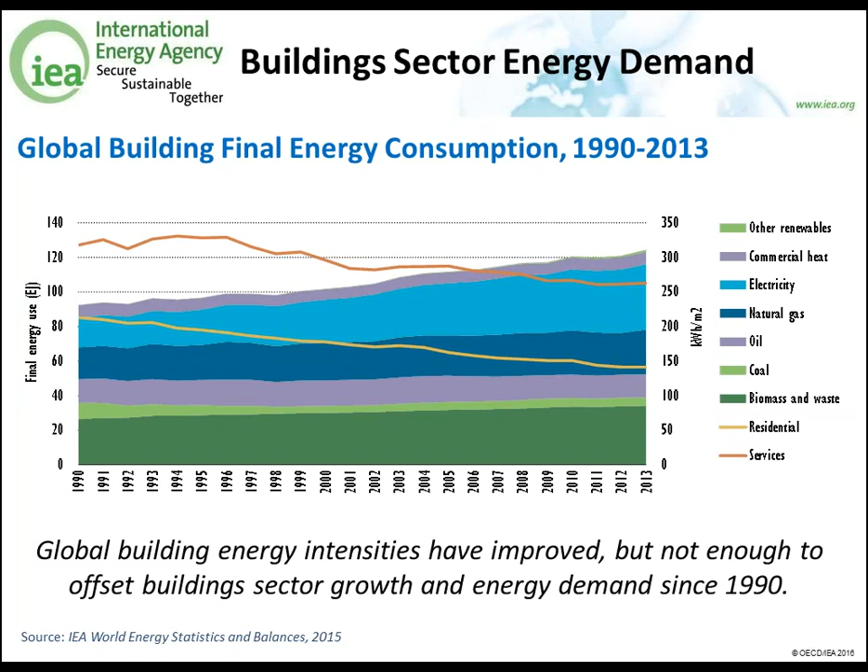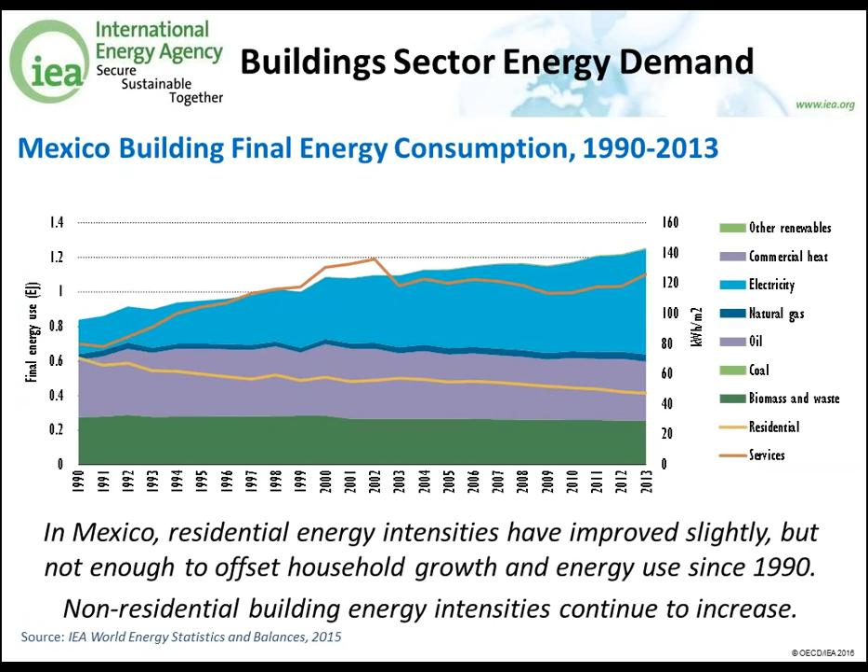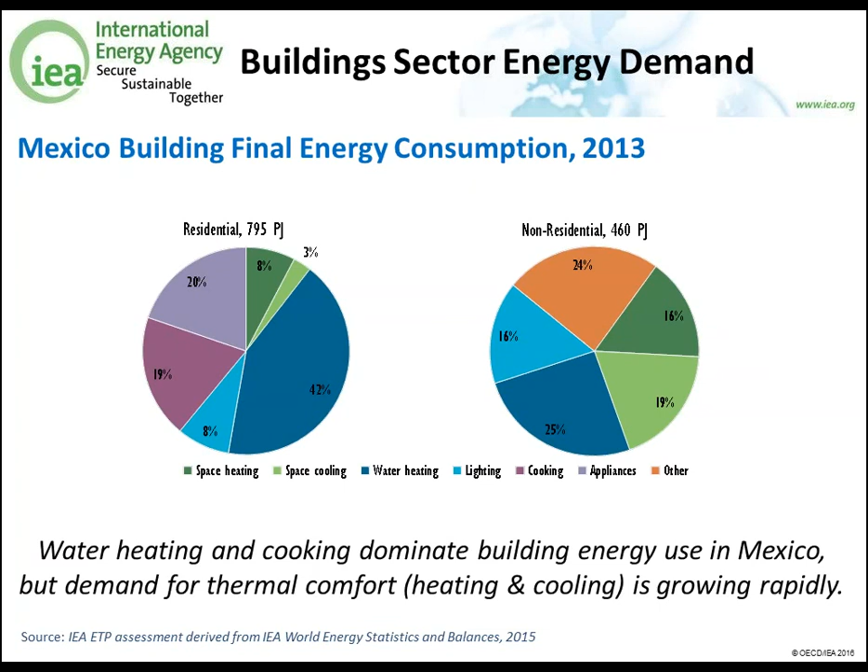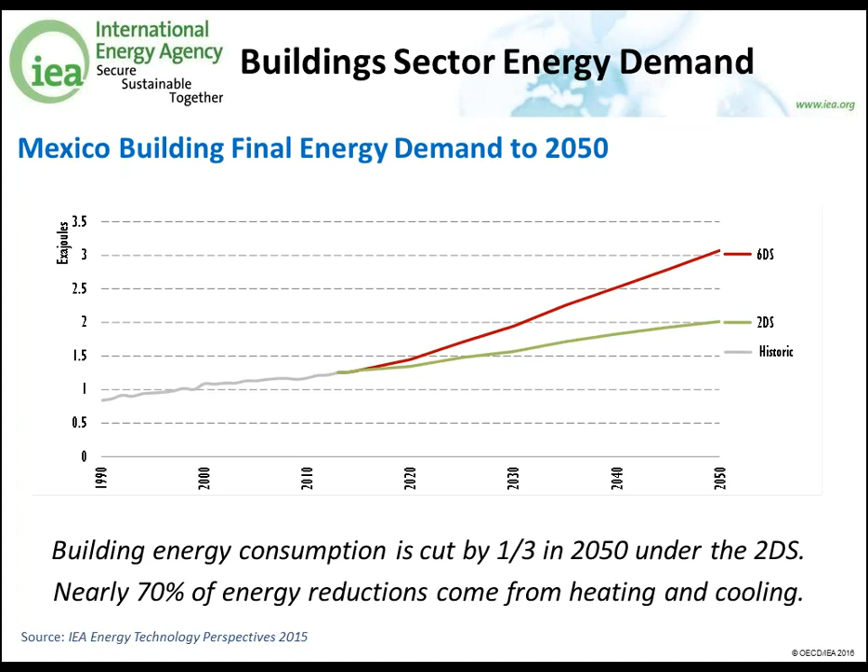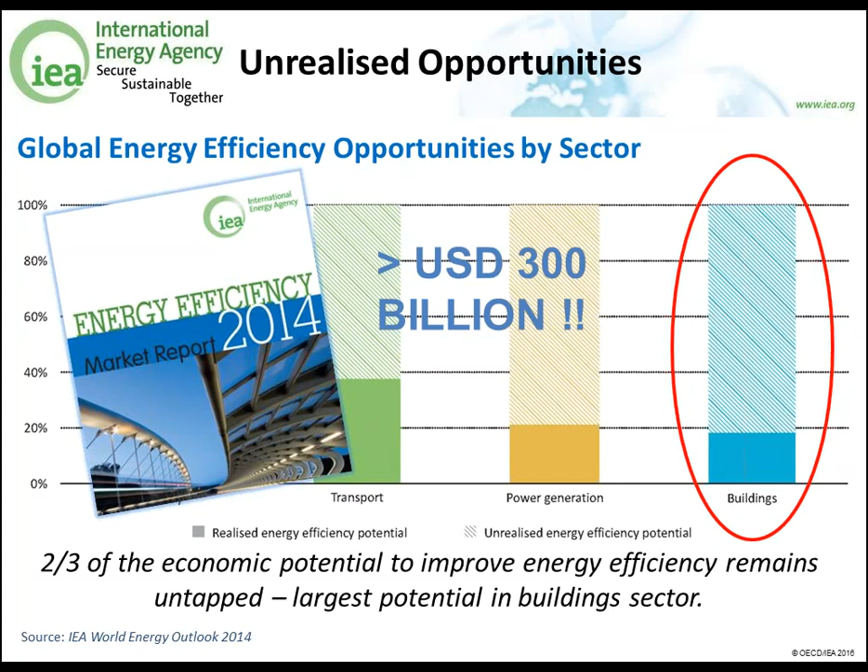And increased household income because of less money spent on energy in the building sector, which has implications for the broader economy. Taking these into account, we have a much more holistic picture of why energy efficiency in buildings is important—not just for reducing energy demand and carbon impact from emissions, but also for the numerous benefits from these multiple benefits of energy efficiency action.

So with that, we'll speak now more to heating, cooling, and water heating opportunities in Mexico, where these are the bulk of the energy efficiency opportunities and savings in the building sector. For those interested in other building end uses, such as lighting and appliances, we have done previous webinars on these topics, and the information can be found online. It's also possible to find practically all of the information we're sharing today for free on the IEA's website.

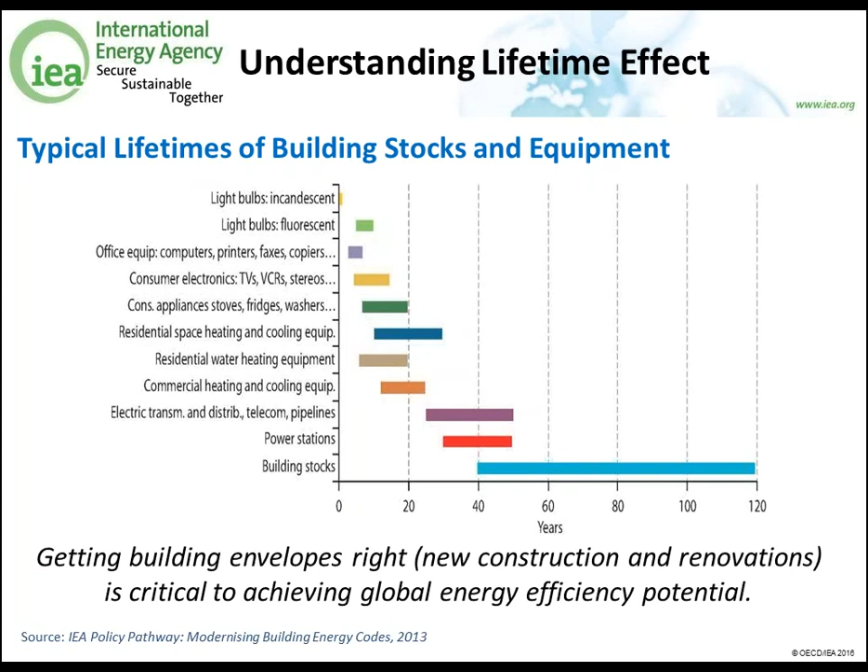And yet buildings, in this sense, are probably the one area that is least treated in these discussions about long-term energy efficiency potential and investment.

Typically what happens is some of this building stock disappears due to demolition, and even in a business-as-usual scenario, some moderate renovations of existing stock occur. Then, looking forward, especially globally and in emerging economies like Mexico, a significant portion is new construction. So how do we build those buildings? How efficient do we build them?

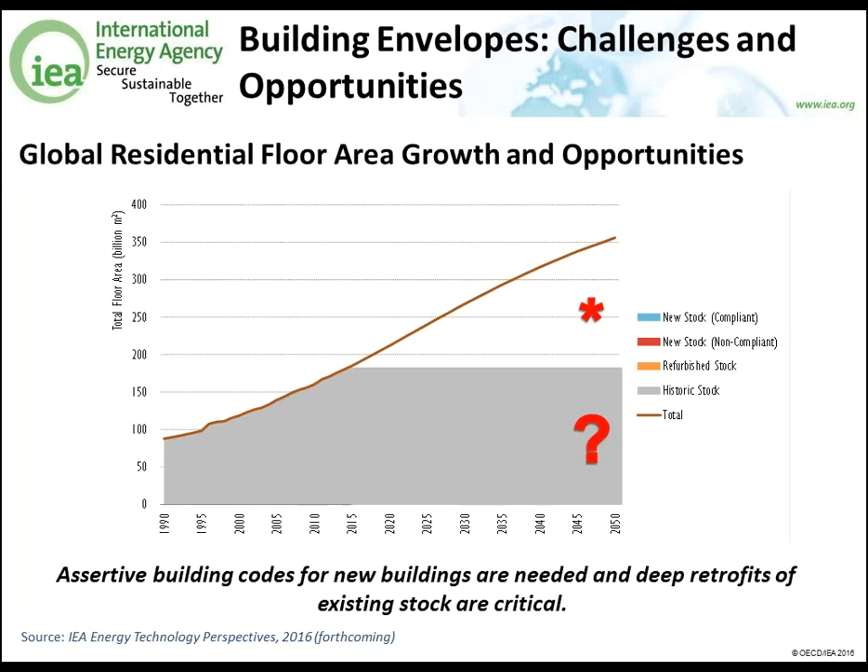In a business-as-usual scenario, our 6DS, we typically expect that roughly half—this depends on the country, the level of enforcement, and the presence of building energy codes—but globally speaking, roughly half of the building stock is probably compliant with building energy codes, whereas the remaining half of new construction is either not compliant or does not have an applicable energy code.

When you look at this in terms of total square meters, remembering that space heating and cooling are globally the largest energy demands in the building sector, this becomes really important, because it essentially means that half of the new construction we expect between now and 2050 will not be compliant with energy codes or have any energy codes applied at all—meaning those buildings will consume much more energy for heating and cooling than they could have had we put those energy codes in place and enforced them.

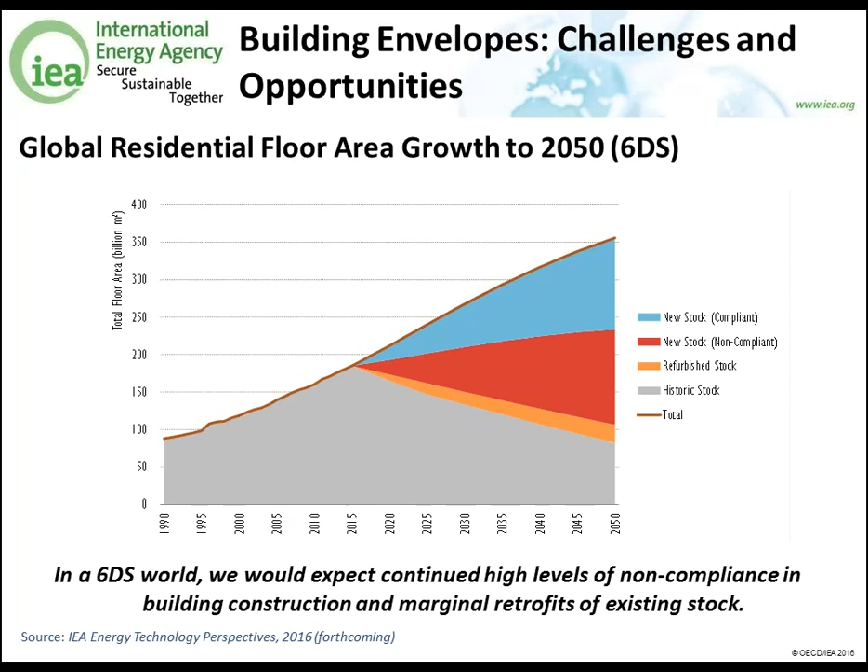In terms of the existing stock, and this applies to certain areas in Mexico where substantial buildings have already been built in terms of total square meters, we want to make sure that when renovating those buildings, we address the energy efficiency opportunities to the most cost-effective potential.

So in a 2 degrees Celsius scenario, globally, what we would expect to happen would be increased use of building energy codes across all countries, making those codes more stringent over time, and putting in place the infrastructure to enforce compliance within the design, construction, and post-construction phases.

We can speak more to this point later on how to develop and implement building energy codes. And of course, making sure that the existing building stock, or the bulk of it, gets refurbished by 2050. Taking into account average building lifetimes, roughly 80% of the world's building stock already in place today will still be in place in 2050.

If we don't address energy efficiency retrofits in those buildings, we are very unlikely to meet the energy and emissions targets for the global building sector.

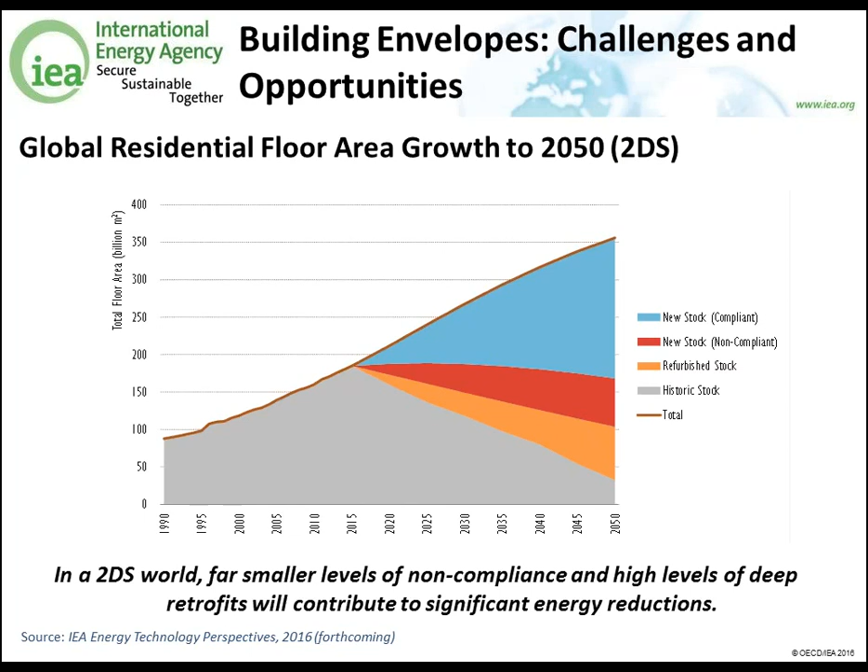As I mentioned, for emerging economies in particular, and especially Mexico, targeting new buildings and energy efficiency in new building development is critical, where we would want to move away from existing construction practices, which in most parts of the developing world and even in many developed economies are relatively inefficient.

This might mean things like single pane windows constructed on site, very low or no levels of insulation, and high air leakage, compared to typical building codes that exist in most advanced regions today.

This would be things like low emissivity double glazed windows, and I'll come back to the point on low emissivity in a second, high levels of insulation, and lower air leakage compared to traditional construction.

What we want to do is move this market, particularly for new construction, towards near zero and zero energy buildings, where we have high levels of insulation and air sealing.

We are using advanced window products, including dynamic solar control, to take advantage of opportunities, such as when we want the sun to influence heat in buildings and when we don't want it to influence heat in buildings.

Also optimizing building design, where in most parts of the world there has been a significant movement to the use of all glass or highly saturated glass surfaces, especially in the commercial sector, and where buildings, because of urban development and urban design, often are not optimized relative to their environmental situation.

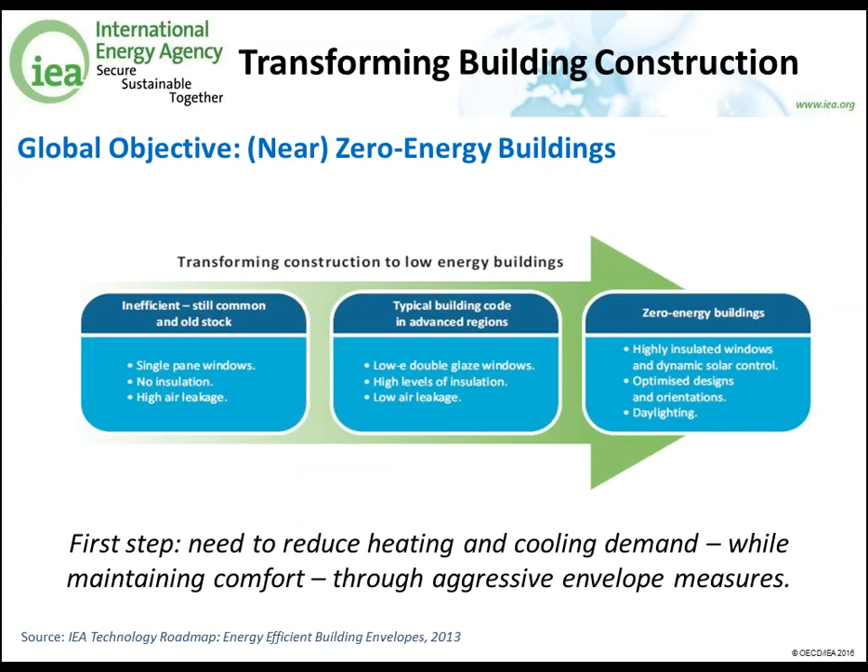We also don't typically design buildings to take advantage of natural cooling, natural heating, and natural daylighting. If these were integrated into building design, we could significantly reduce the final energy loads in buildings.

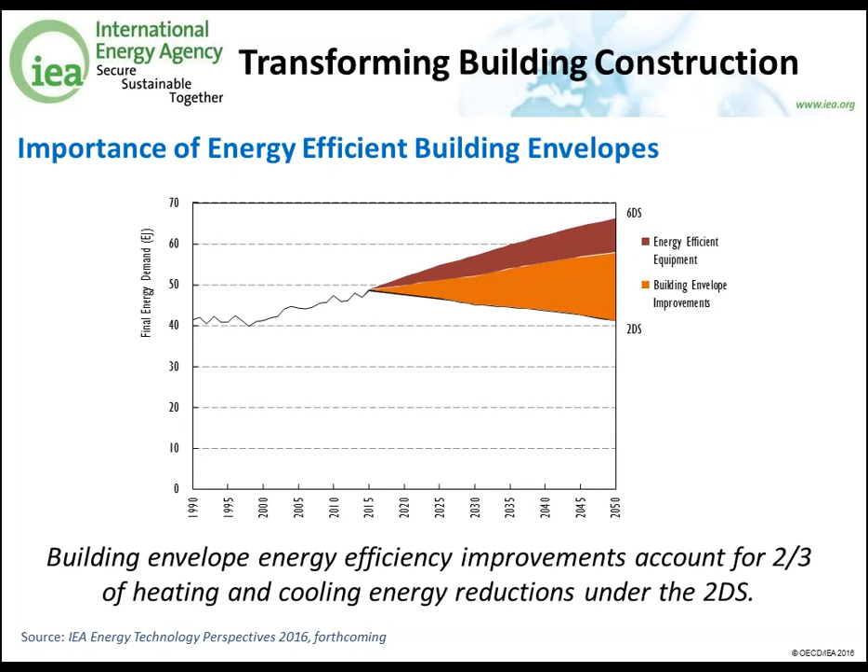In terms of the role of building envelopes in energy savings potential for heating and cooling, our model assessment finds that more than two-thirds of heating and cooling energy reductions are likely to come from building envelope improvements. This is only possible through the development and enforcement of rigorous building energy codes that address building construction and, in existing buildings, seek to improve efficiencies to the most cost-effective point possible.

So in terms of the components, once we've constructed a building, my colleague Brian will come back to some of the policies related to implementing and enforcing building energy codes. Once we have these buildings in place, the question is, how do we provide the energy utility or energy services for demand in buildings?

With regards to heating and cooling, it's critical that we address, especially in Mexico, the key elements related to heating and cooling loads in buildings, which is probably first and foremost cool roofs, ensuring that buildings are not absorbing heat from the sun, which drastically increases the demand for cooling.

We're also using insulation and advanced window products to treat the environment and radiation from the sun in a way that reduces the need for cooling in buildings, and also treating air leakage, which in most countries can be a significant contribution to heating and cooling loads.

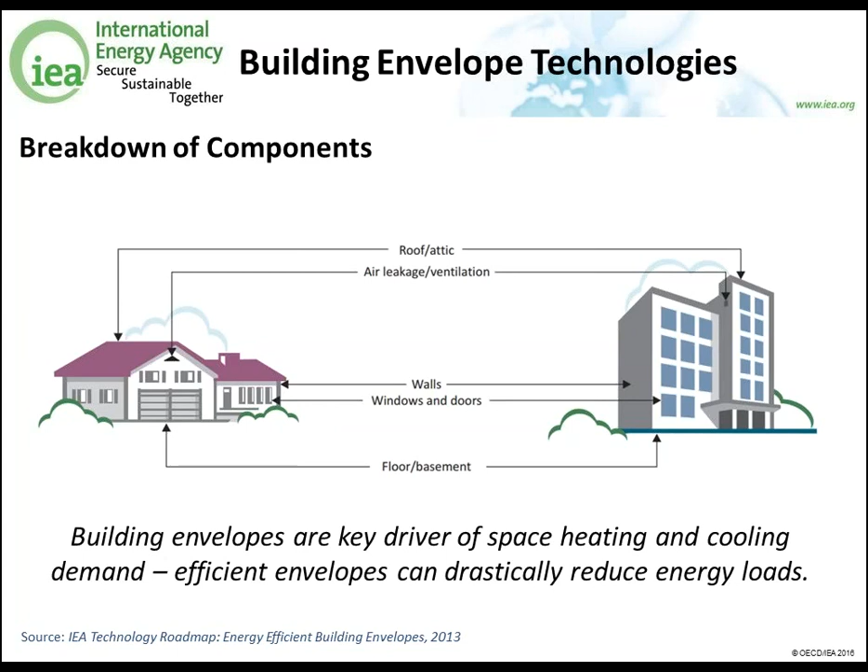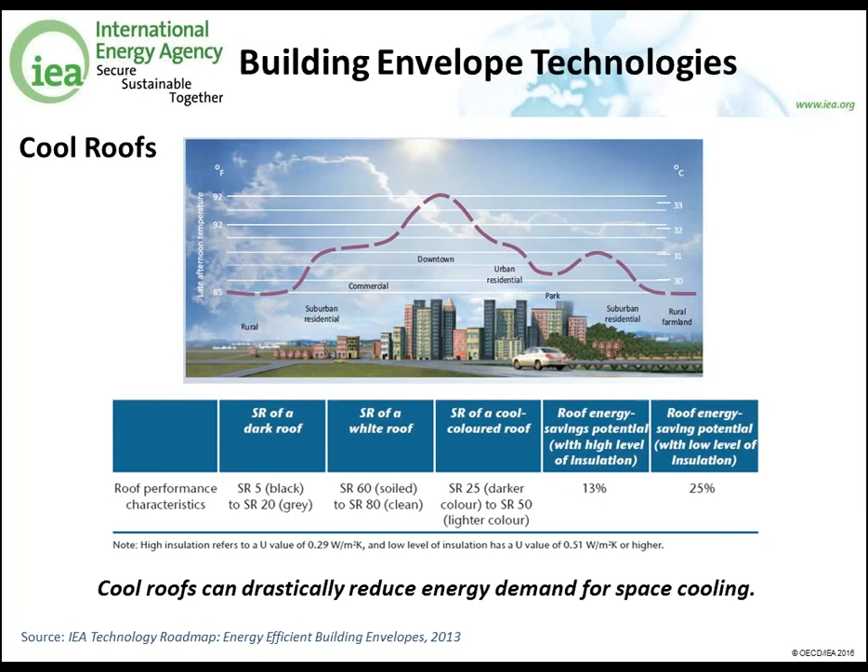It's also probably one of the most simplest ways to address heating and cooling. Looking across some of the reasons this becomes important in Mexico, Mexico is highly urbanized, and the increased use of cooling in buildings is not only driven by the sun and climate in Mexico, but is also a driver of the urban heat island effect. Both the radiation of heat from the sun back into the urban environment, as well as heat produced by buildings that is released into the environment, continue to increase the demand for space cooling in buildings in Mexico. We know that existing cost-effective technologies and building design can significantly reduce the impact of urban heat island in cities.

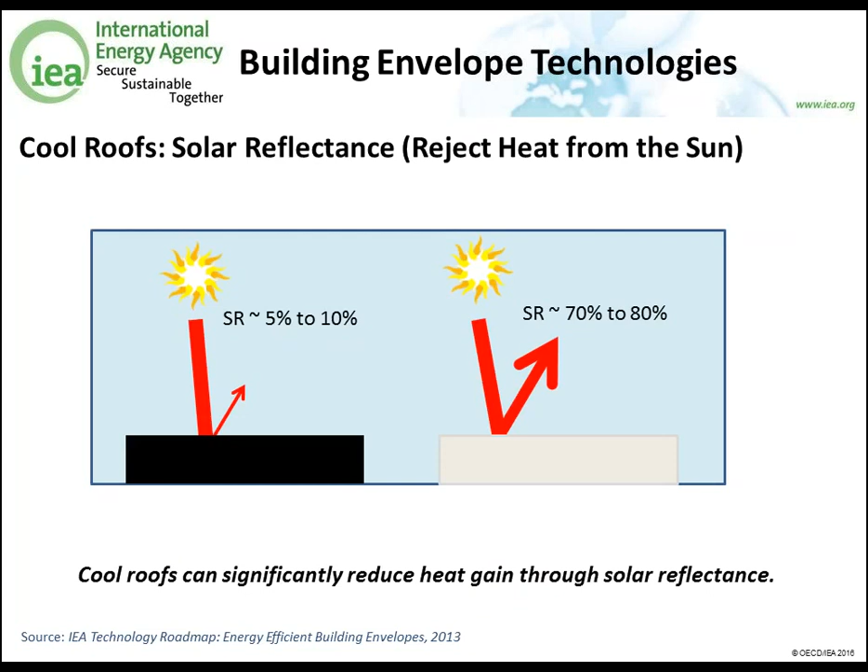One of the simplest and most cost-effective technologies for Mexico, and for that matter many parts of Latin America and other warm climates throughout the world, is cool roofs, where the design of a roof to reflect or reject heat from the sun can significantly reduce energy loads for cooling in buildings. A traditional roof, often asphalt or another dark product like tar, absorbs typically between 90 and 95% of the heat from the sun through solar radiation. Through the use of cool building products, we can reduce this to less than 20 to 30% of heat absorbed from the sun in buildings. This is a significant difference and can drastically reduce building energy demand for space cooling.

Another critical product, coming back to low emissivity or low-E windows, is the use of windows to reject heat or, when necessary, keep heat in buildings, depending on the climate. The bulk of the world's windows, including countries like Mexico, are typically single-glazed or maybe double-glazed aluminum frame windows that are not exceptionally efficient. These can be significantly improved through the use of double-glazed low-E windows, and in cold climates, less the case in Mexico, the use of triple-pane windows.

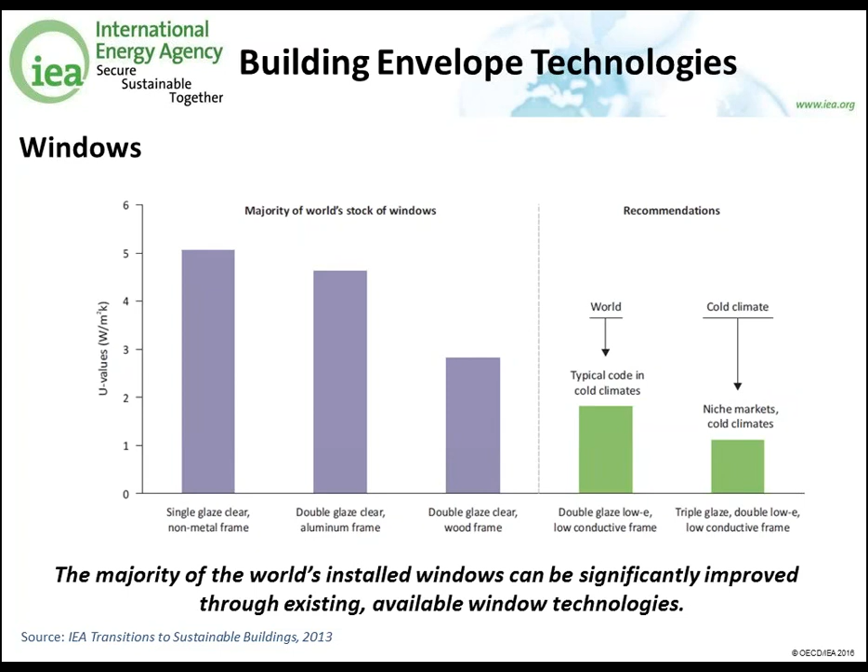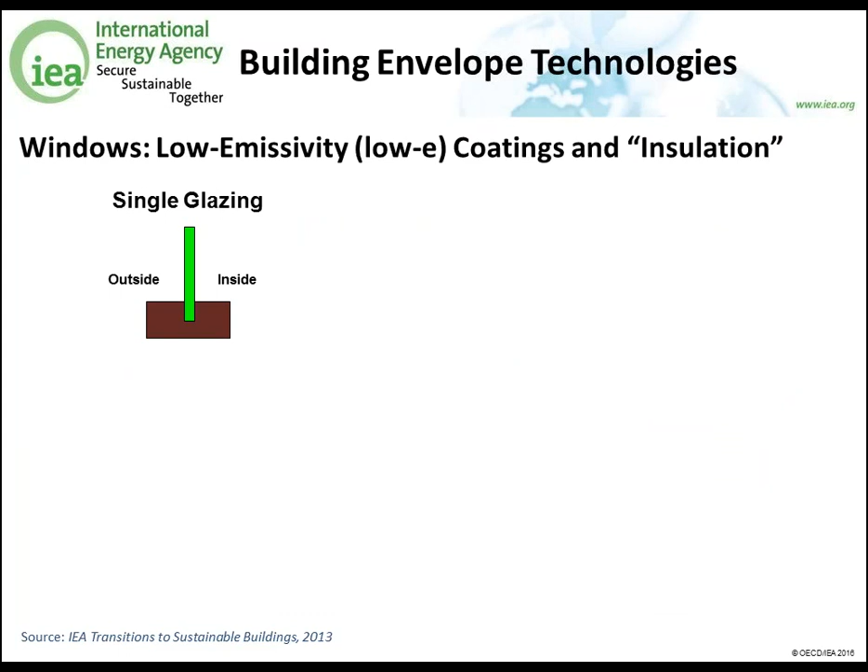Now, what is low emissivity or low-E windows? Most of you are familiar with single glazed windows. This is a pane of glass, often made on site, typically with either a wooden or aluminum frame, or in many cases it might even be concrete surrounding the glass.

And we move towards double glazing, which is increasingly common in many countries across the world, without a low-E coating. Essentially this is just an air gap that might have an inert gas inside between two panes of glass. There's a relative level of insulation because of this air gap between the two panes, which helps reduce some of the heat loss or heat gain in buildings. But it doesn't do anything about the reflectance and the heat gain from the sun.

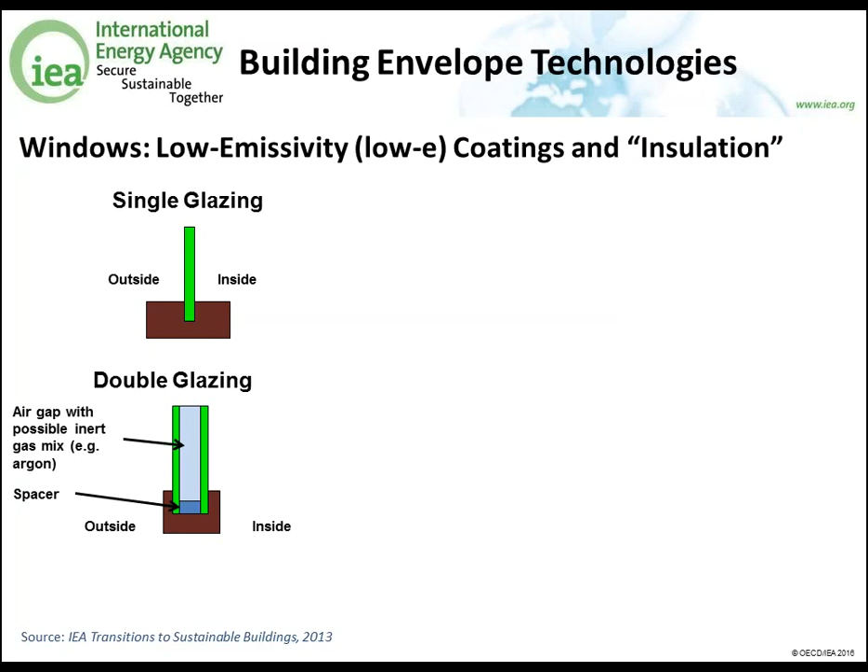A low-E coating, and this depends on the climate, actually depends on which side of the window you put the coating on. But essentially what a low-E coating does is reflect the near-infrared light from the sun, and it then rejects, depending on the direction, the long-wave radiant heat either to or from a building.

For example, in a cold climate, which is the illustration here, what this means is that we would accept the visible light, which is obviously important in buildings, and reject the near-infrared light, which would reduce the cooling load in buildings. But at the same time it would also reject the heat back into the room, so the radiant heat leaving the building through the window, which helps to save on space heating.

If you reverse this, essentially for hot climates, you can see the black line below, we would allow more rejection of heat from the building and less infrared light rejection on the exterior shell. This is a very simple technology, cost-effective in most markets. It's usually more about market conditioning and working with technology providers to get these products on the market, but they can significantly reduce the demand for space cooling or, in cold climates, space heating in buildings.

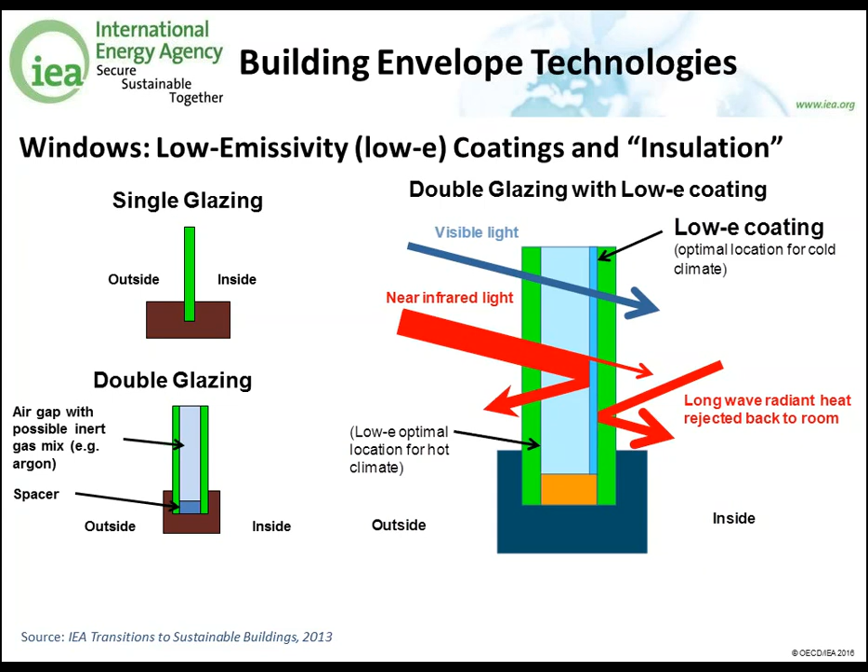Again, the critical point here is that we continue to increase the amount of window surfaces in buildings, especially commercial buildings, and we therefore need to make sure that when we're using windows in buildings that we are using the best technology available, since this can have a significant impact on heating and cooling loads.

These are advanced products. We hope to bring these to market, especially in warmer climates, over the next 30 to 40 years, but for the most part they're still very expensive. As I mentioned, traditional techniques like exterior porches or simple shading on buildings can also be used and be very effective.

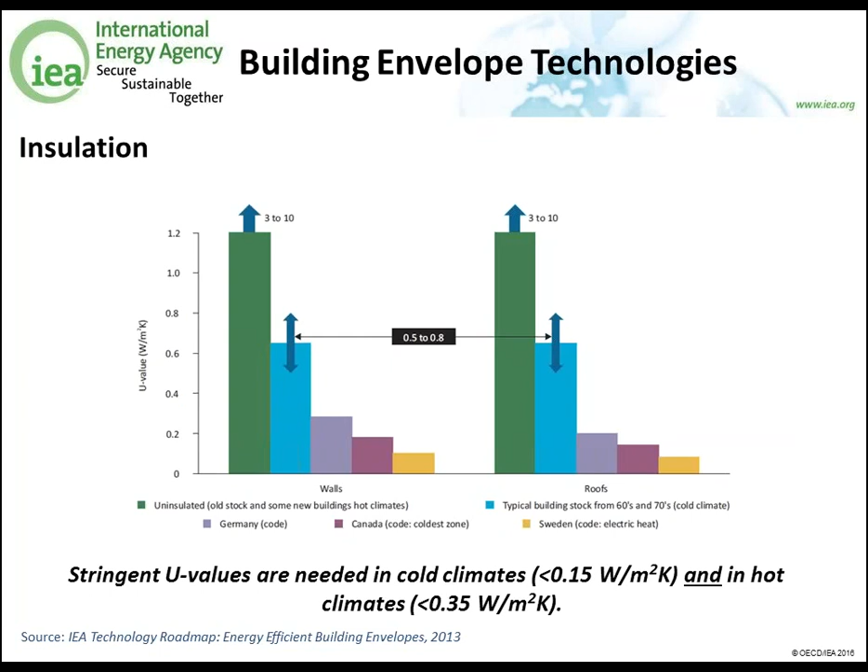This again applies to building energy codes, both the development and implementation as well as enforcement. By addressing building design, construction, and then evaluation post-construction, we can do a much better job getting buildings down to acceptable, cost-effective levels of insulation that drastically reduce heating and cooling demand.

The last point, as I mentioned, is air sealing, which is extremely cost-effective and very simple to do. There are different technologies used in this area, from polyurethane foams that can be sprayed to your traditional paneled insulation or fiberglass insulation.

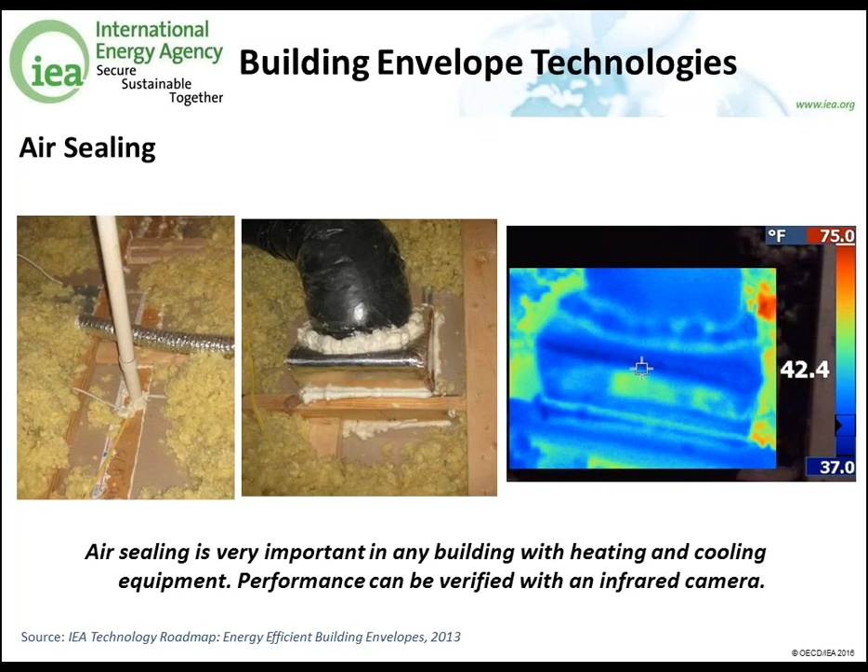Now, in all of these cases, whether windows, air sealing, or insulation, especially in warm and hot humid climates, there's also a concern for humidity in buildings. This is not only a building design question but also a heating ventilation issue. We want to make sure that as we build these buildings and make them more airtight and better insulated, we're not creating an interior humidity problem, which could lead to issues like mold. Designing the building properly with the right ventilation, natural or mechanical, is important to ensure the building is energy efficient but also healthy and safe to live in.

As a last example, which applies to some building types in Mexico, building retrofits are critical to achieving global energy efficiency and carbon targets in the building sector. There are lots of cost-effective ways to address this in most building types, save perhaps some historical monuments that are more difficult and cost-expensive to renovate.

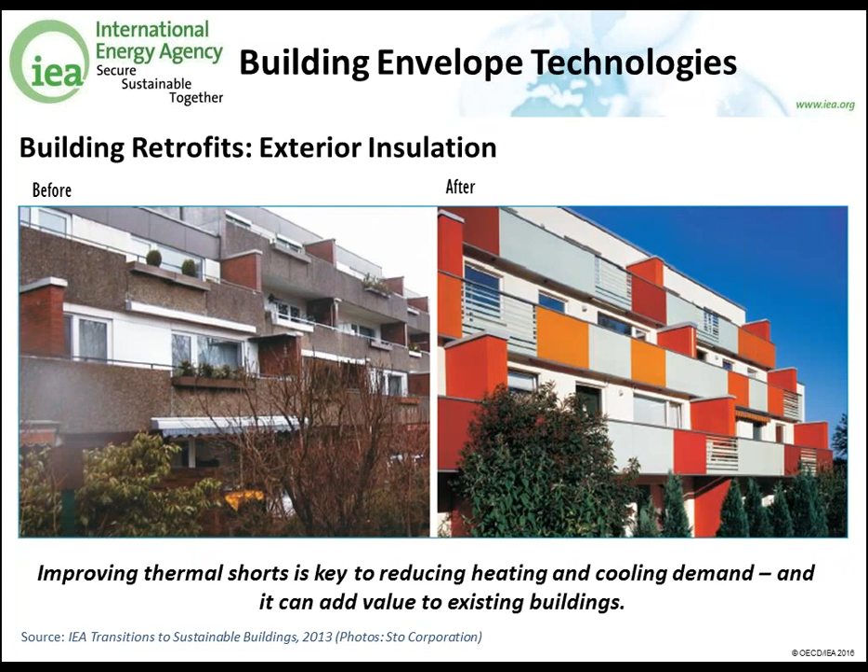But for the typical building stock, whether residential as pictured here or commercial, it is often very cost-effective to use simple measures like exterior insulation shown here, air sealing, replacement of windows, and replacement of roofs, to drastically reduce energy demand in existing buildings.

These measures are not only drastically reducing the heating and cooling loads in the building, but at the same time they're also increasing the value of the building, because you've now made an investment that makes it not only more attractive, but also a healthier and more efficient place to live. Taking into account these multiple benefits, the energy prosperity of building energy efficiency measures can really sell the case for energy efficiency retrofits in existing buildings.

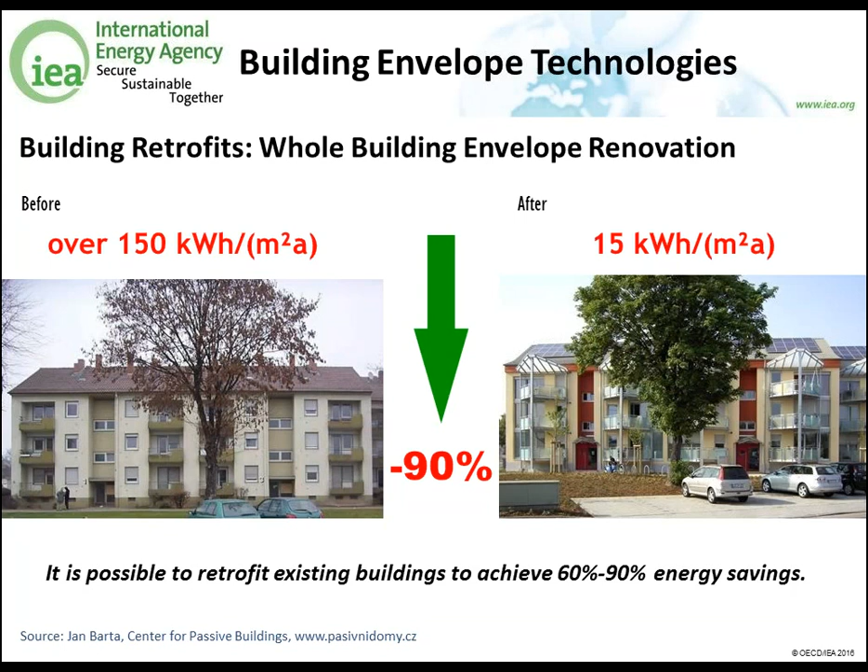Now, finally, the last question, and I think this is particularly important for today's conversation about Mexico, are the technologies we use when we do have to provide heating and cooling in buildings. The direction we are encouraging for all countries is to bring heating and cooling demand as low as possible through building envelope measures. But heating and cooling will always be an issue in buildings, and there are several technologies that are extremely cost-effective and energy efficient already on the market today, with recommendations we think are particularly applicable to Mexico and other warm climates.

The first is heat pump technologies. I've given two examples here: electric resistance heaters, often called toaster grills, essentially take electricity and convert it into heat. These are technically efficient because it's an electrical conversion, so it's 100%, but they can be significantly more efficient using heat pump technologies, which typically have efficiencies of 250% or more.

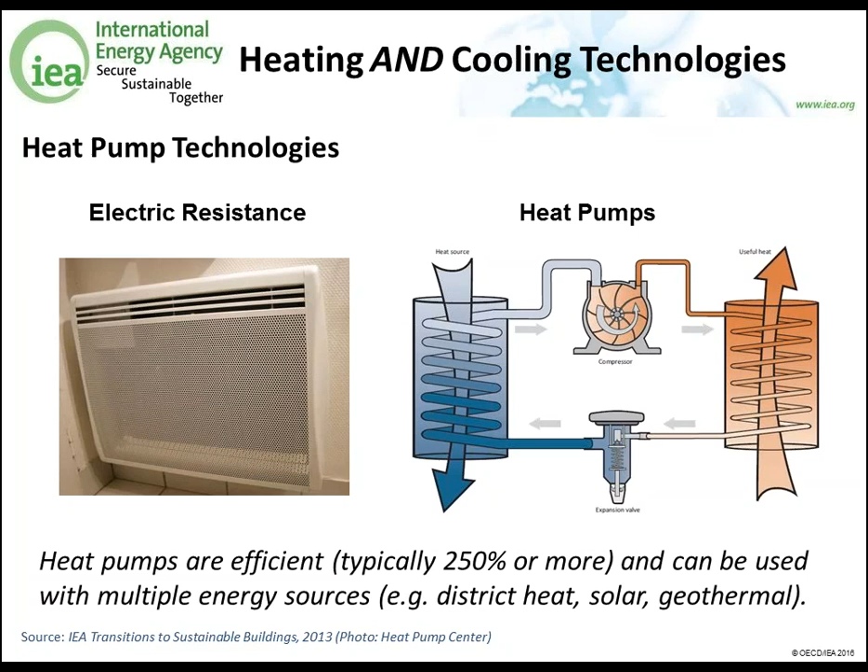In moderate to warm climates, heat pump efficiencies are generally extremely efficient because the temperature gradient is not that big relative to cold climates like Norway or Canada, for example.

Now, as an example of some of the products on the market and the typical efficiencies we see—again, these are small-scale heat pumps traditionally used in the residential sector—you can see that for almost all of the heat pump examples shown here, efficiencies are typically above 200%. In warmer climates, where the delta T for the temperature exchange is typically smaller, the efficiencies can be even higher. There are also different heat pump technologies. The most common is air-to-air, an air source heat pump that takes heat from air and rejects it to air. There are also air source heat pumps that use water.

So, for example, heat pumps are either taking heat from the air and using it to produce hot water, or they are taking heat from an external water source, like a river or a lake, and using that to either cool or heat a building. Then there are ground source heat pumps, which are typically more expensive because it's a much larger infrastructure, taking energy from the ground for heating and cooling, and can be very effective. Again, this is largely due to scale - we're increasing the size of the equipment and we have better efficiencies.

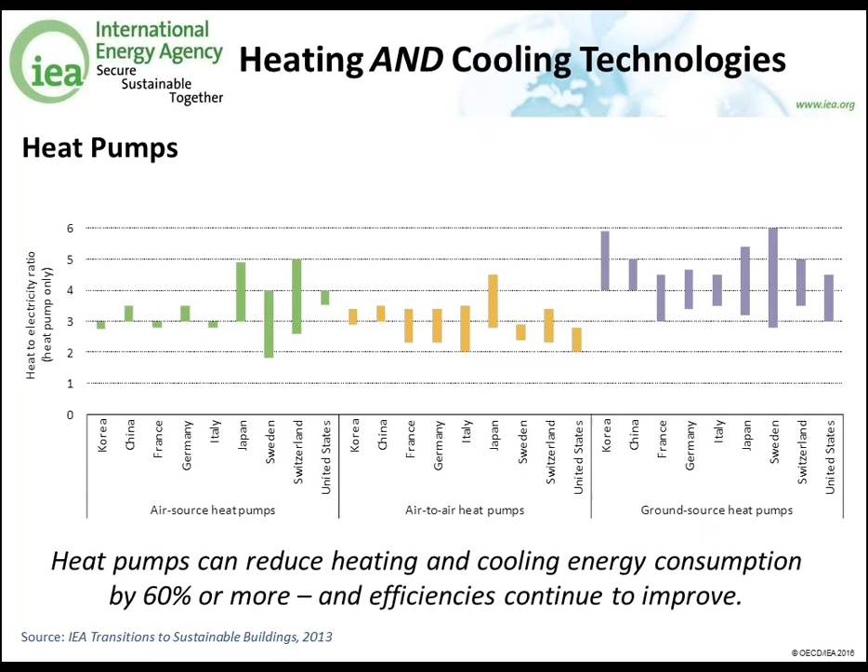And again, these technologies are available. It is more a question of market conditioning, getting these products out into the market, creating the right incentives and policy levers to ensure that consumers are buying these products.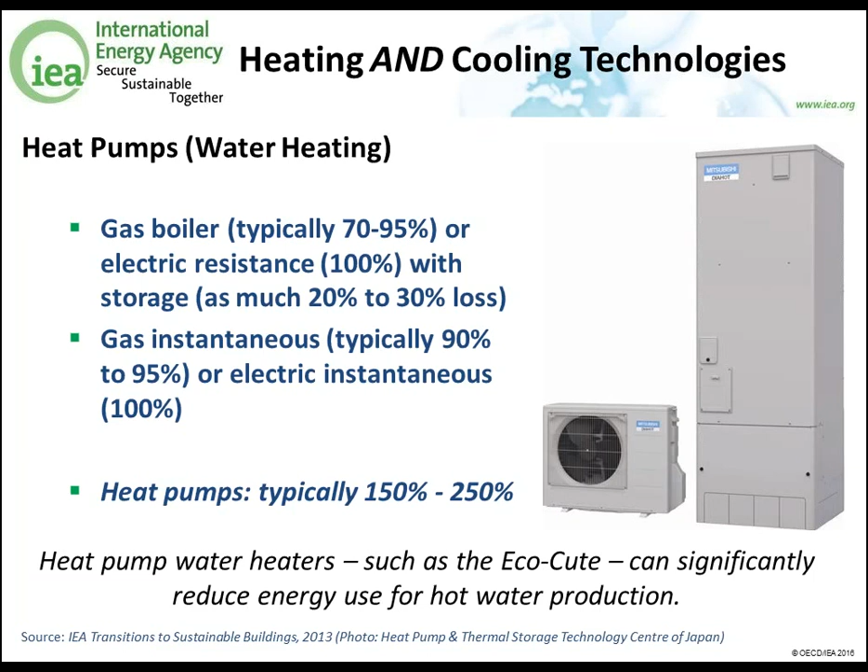Now, I mentioned most of our publications are available online for free, if you visit our website at www.iea.org. The first and most applicable to the work we do with regards to technology in buildings was a buildings book released in 2013 called Transitions to Sustainable Buildings. This is essentially a practitioner's guide to the different technologies that exist across the end uses in buildings.

We also released a technology roadmap on energy efficient building envelopes, where building envelopes play a critical role in achieving energy efficiency in buildings. We also have technology roadmaps on heating and cooling equipment, solar heating and cooling, as well as policy pathways, which are a step-by-step guide walking you through the development, implementation, monitoring, and evaluation of policies for building energy codes and certification. Again, all of these are available on our website.

So I will pass it now to my colleague Brian Dean, who will speak to you more about the policies for energy efficient buildings. Okay, great. Thanks, John.

Let me start off first by saying one of the other publications that the IEA developed is Energy Efficiency Policy Recommendations. We like to go back to this as a starting point for framing our policy discussion. We actually did a presentation on this last year, in November of 2014, where we walked through all of the policy recommendations across all the sectors.

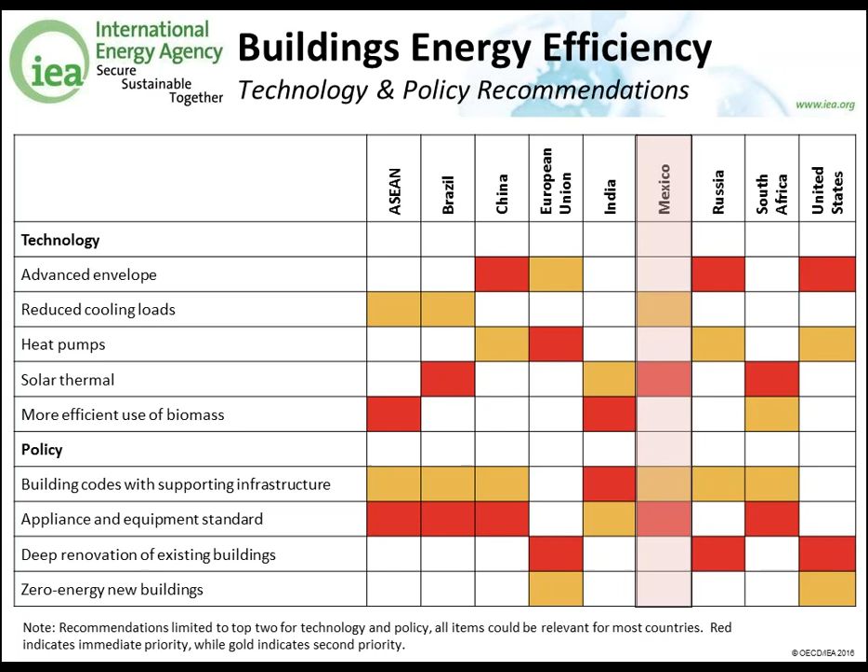That then led us to work with SENER and CONUEE over the past year and a half, where we looked at energy efficiency policy recommendations for Mexico with a particular focus on buildings, space cooling, and building energy codes. Through that effort, we had 3 major sets of recommendations around governance, capacity building, and policy and program recommendations - so 20 total recommendations for Mexico.

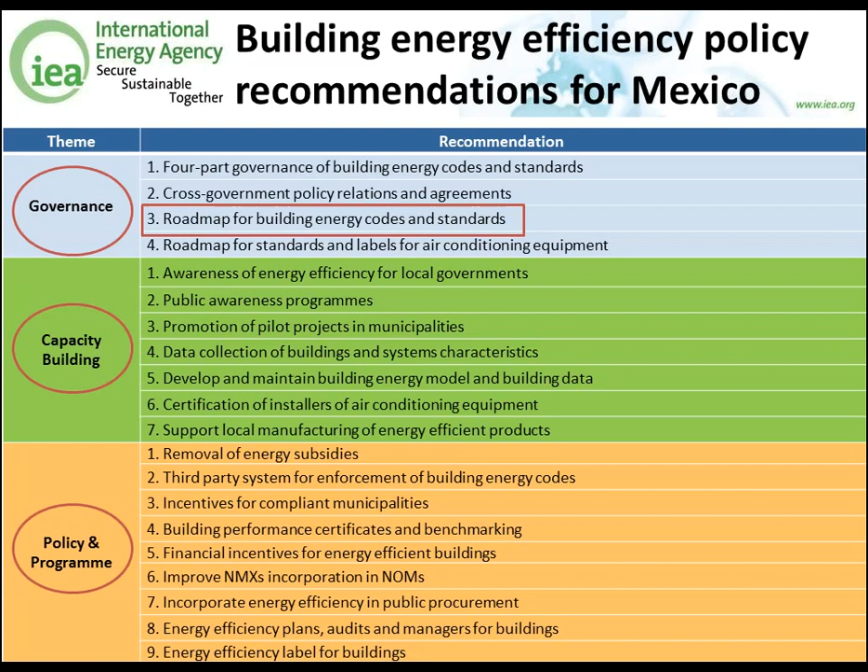One of the areas we're currently working on with SENER and CONUEE and others is pulling together a roadmap for building energy codes and standards. This roadmap is intended to be a means for looking into the future and making sure that building energy policies are coordinated in a way that will create energy efficient buildings moving forward.

We do this building energy codes research globally, and we look at the coverage and the types of codes that are developed globally. What we find is that there are opportunities for lessons learned from various countries and examples of well-developed building codes. So we bring this type of information into the discussion.

But what we also find is that sometimes the development of good building energy codes is not the whole picture. So in terms of our roadmap, we're looking at going beyond and making sure there's strong local adoption and enforcement of the building codes, going beyond just the development of the code itself.

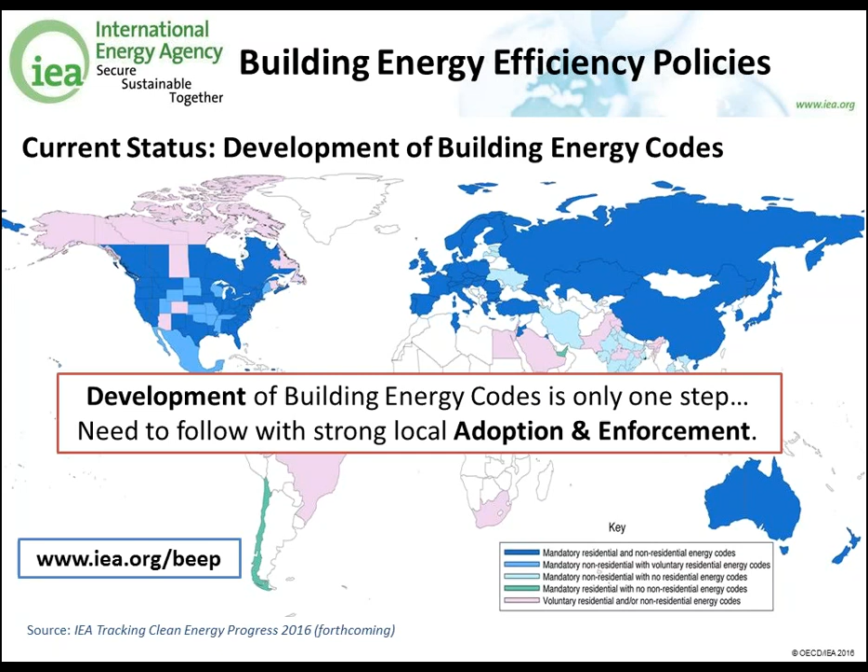Now, if you're looking for information that we store in a database, you can go to iea.org, BEEP, B-E-E-P, our Building Energy Efficiency Policies database. We are continuing to add to that database every year based on information that we get from countries around the globe.

And for Mexico, what we worked up for the building energy codes was a 4-part governance of building energy codes. And what we find with that is that in terms of the lead organizations for each of these 4 parts: plan, adopt, enforce, and review and update.

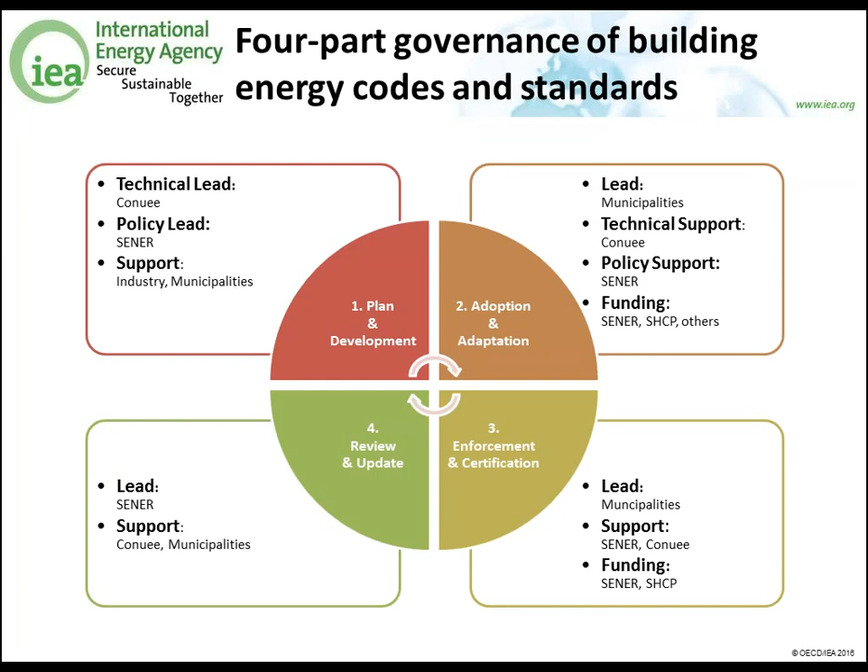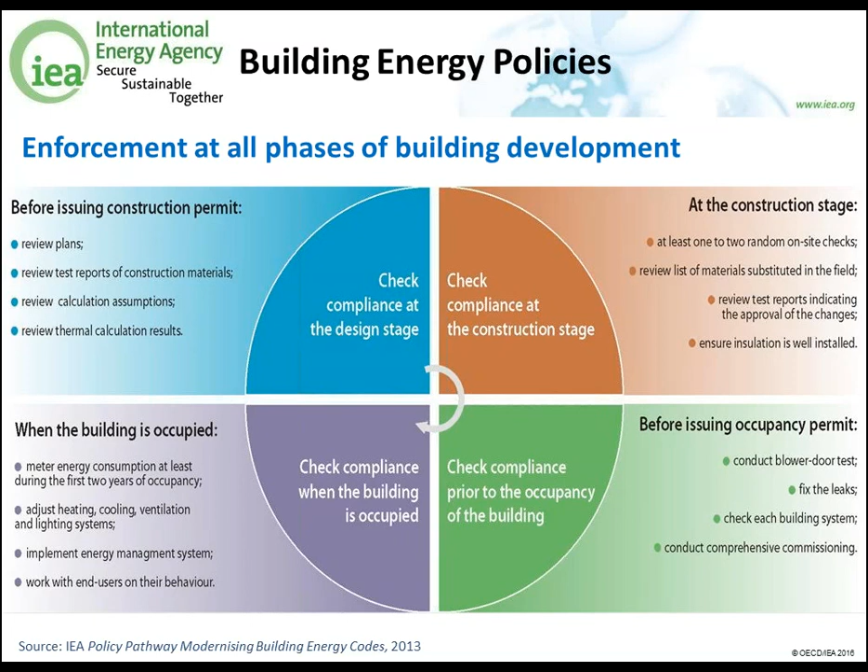Now, in addition to those policies, there's also a large issue in terms of energy renovations, and it's often much easier to set up policies that control new buildings. However, we can set up good policies that can impact the energy renovation process.

Countries like France and Germany have done a great job of setting up tax policies and financing policies that are putting billions of dollars of renovations into the market every year. Now, also training for energy retrofit services can go along with the energy ratings and certification as well. And then the very last item is actually making sure that the government does its part, so leading by example and having improvements in the public sector buildings.

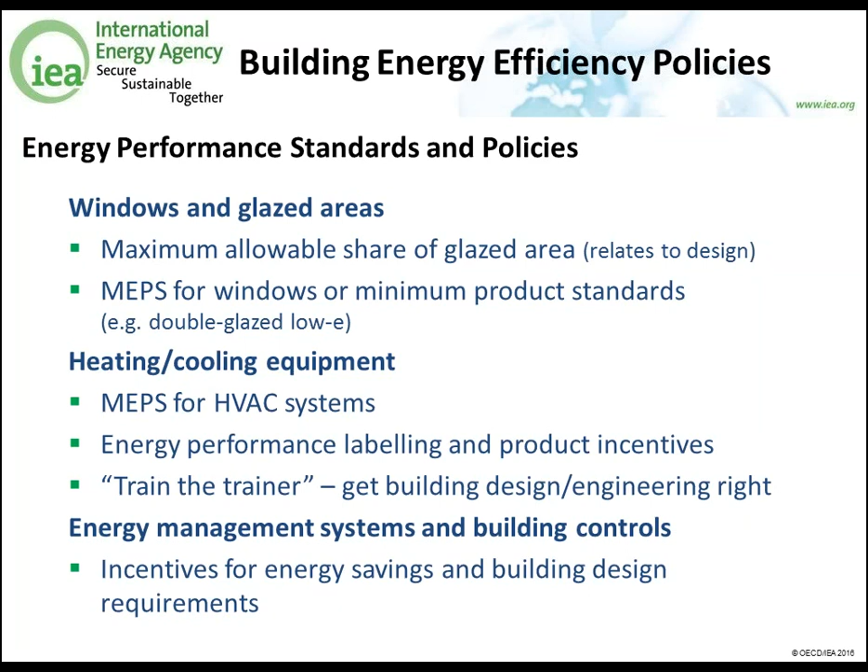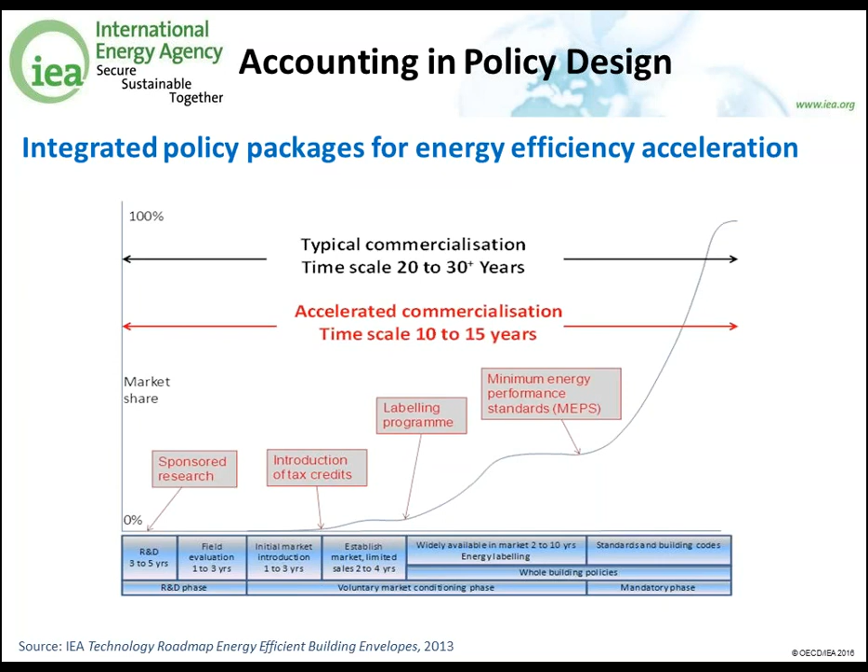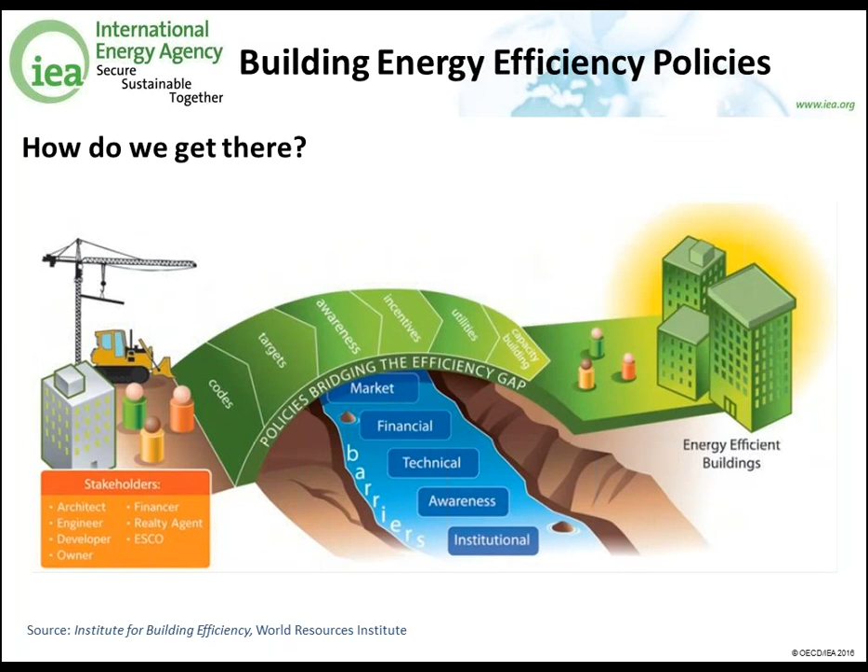That leads me to the point of collaboration. I want to talk through a series of the IEA's technology collaboration programs that relate to buildings. There are actually 5 of them, and you can see the website there. You can click through and get to each of the websites for each collaboration program. The largest one is the Energy in Buildings and Communities, which has a series of tasks I'll show on the next slide. It's working most broadly on energy issues in both buildings, but also at the city and urban level.

Next is heat pumping technologies. I think those two are probably the most interesting for Mexico. However, there's also 4E, the energy efficient end use equipment program, covering appliances and technologies that go into buildings. District heating and cooling covers services available for building technologies to attach to for both heating and cooling. And the last one is energy conservation through energy storage. So these are the 5 buildings collaboration programs.

For EBC, the Energy in Buildings and Communities program, I have these listed from the most recent at the top and the older annexes at the bottom. All of these annexes are still active projects. The newest one, energy epidemiology, looks at energy data to better understand buildings, and better understand the health and operation of these buildings. There was a workshop in Mexico just a couple of weeks ago that explored this issue with Mexico.